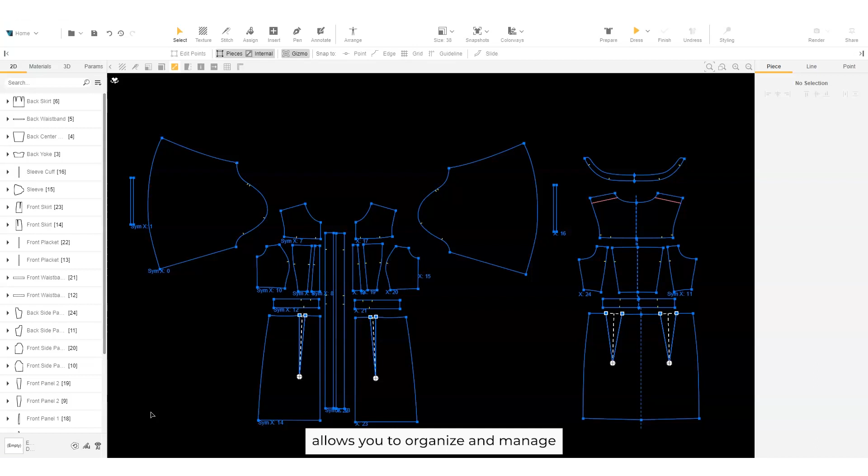The 3D layer feature allows you to organize and manage pattern pieces with a stacking order. This feature is useful when working with garments that have multiple pieces stacked on top of one another, such as patch pockets, plackets, and cuffs.

The 3D layer feature uses the following logic. Layers with lower numbers are closer to the body. Layers with higher numbers are further from the body. By default, all pattern pieces are assigned to layer 2. Layer 0 is the layer closest to the body.

Adjusting 3D layers is important because it ensures that there are no collisions when we stitch and drape patterns on top of one another. Let's see what patterns we need to change the layers for in our file. If you are coming back to this file after working on another garment, be sure that the correct avatar is loaded in the 3D window. Click Prepare to see the previously arranged pattern pieces.

For example, this placket on this dress overlaps. The wearer's right placket should be sitting one layer above the wearer's left placket. Since the default layer for all patterns is 2, we can either reduce the layer of the wearer's left placket or increase the layer of the wearer's right placket. Let's increase the wearer's right placket layer.

To change the 3D layer of a piece, we use the Select tool, then go to the 2D window and click the piece. After that, we go to the Context view. 3D layer is displayed in the Draping Properties section. We simply type in the value we want for the piece. We will change the wearer's right placket to layer 3.

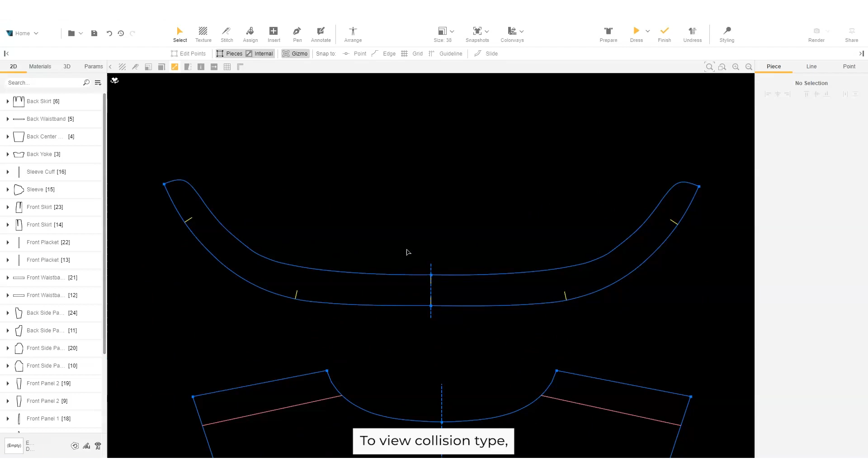The Collision Types feature allows you to set the order in which pieces are layered when they collide. This feature is particularly useful when working with pieces such as cuffs, plackets, button-up shirts, and collars. To view collision type, we click a pattern piece, then go to the Context view in the Draping Properties section. Note that there is a default collision type. Clicking the drop-down displays the available options. How do we know which is the correct one to use?

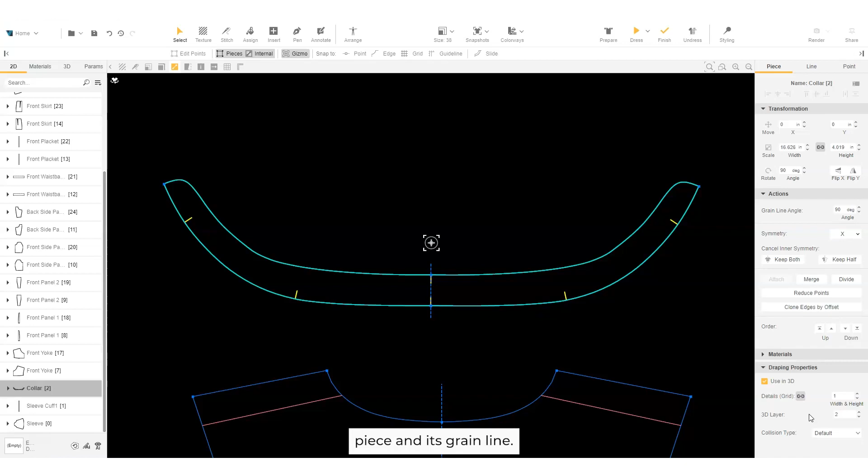To know which option we should select, we must first look at the pattern piece and its grain line. We turn the display of the grain line on using the appropriate button on the 2D window toolbar. The grain line determines the collision type direction of a piece.

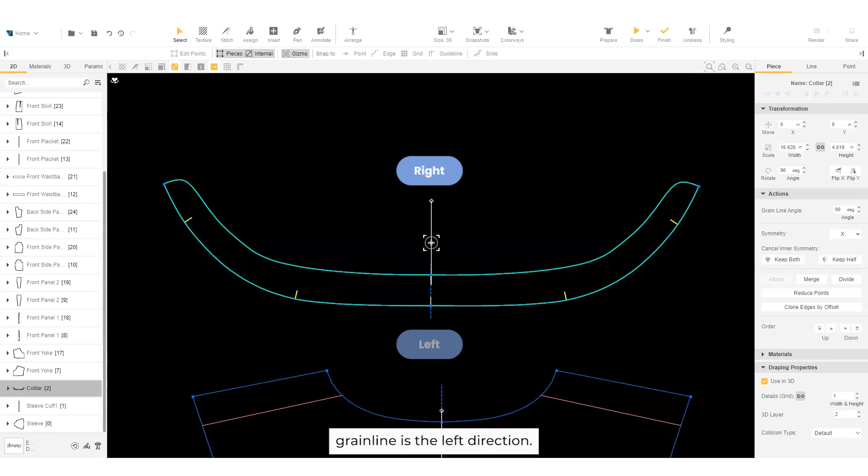Think of the grain line as a compass, where the diamond shape shows the rightward direction the grain line is pointing to. The opposite direction to the grain line is the left direction. Top is clockwise from left, and bottom is clockwise from right.

In this garment, we have a collar where we want the part of the wearer's right to overlap the part of the wearer's left. First, let's identify the wearer's right. From this, we know we need to change the collision type to bottom over top.

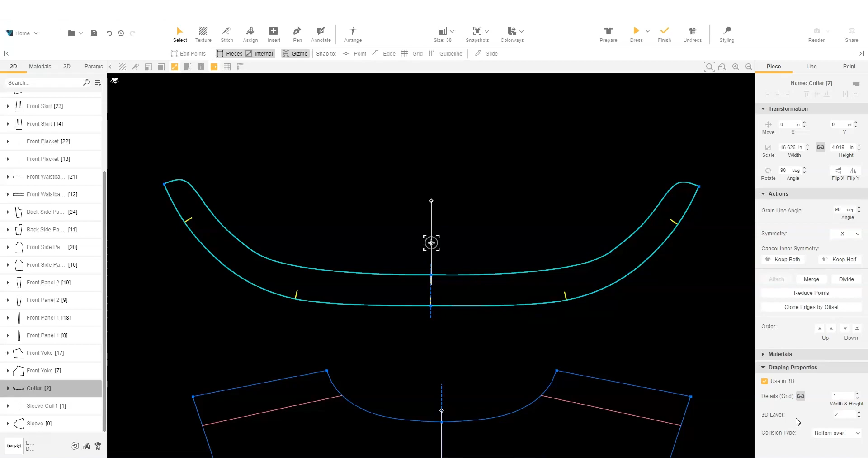If the grain line is not correct as seen on the pattern, we can rotate it. Selecting the grain line, we can use the gizmo to rotate it. Hold Shift while rotating to constrain the rotation to 45 degrees. With the new grain line rotation, the collision type should be right over left.

In the 3D window, for the collar to be overlapping in Prepare mode, we need to turn on Constrained Area in Arrange mode. Now the part of the wearer's right is overlapping the part on the wearer's left. Let's save our file.

In this video, we've covered 3D layers and collision types.